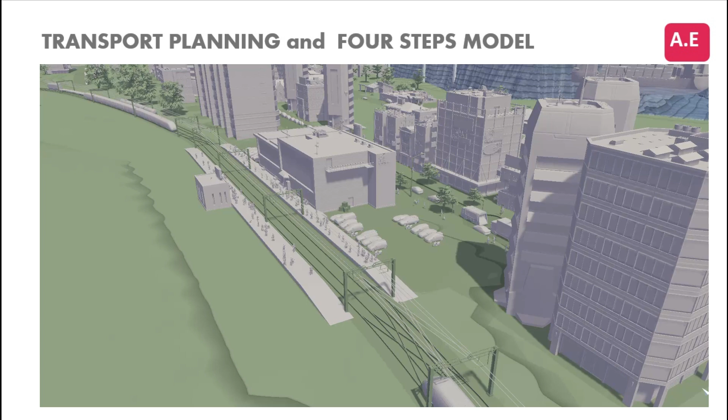Today, we embark on a journey into the fascinating world of transportation planning, where the intricate interplay between mobility, sustainability, and urban development shapes the way we move within and between cities. Over the next few minutes, we'll explore the foundational concepts that underpin this dynamic field and lay the groundwork for deeper discussions on demand modeling and trip generation.

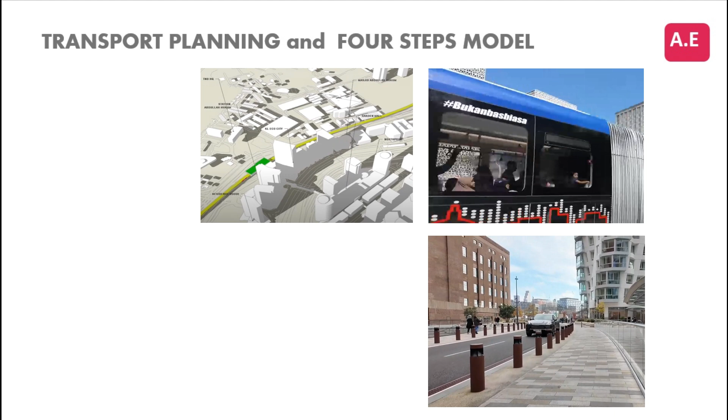Transportation planning is far more than a mere series of decisions. It's a multifaceted process that begins with a vision for a more connected and sustainable future. From articulating goals to assessing opportunities and constraints, we navigate a landscape rich with challenges and possibilities. Key themes such as sustainable mobility and the symbiotic relationship between land use and transportation planning guide our exploration.

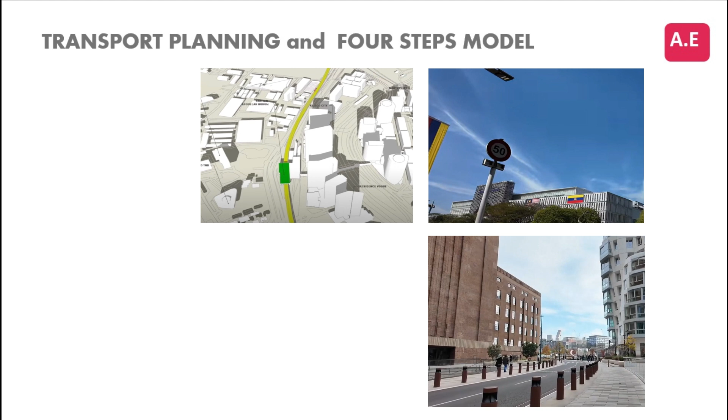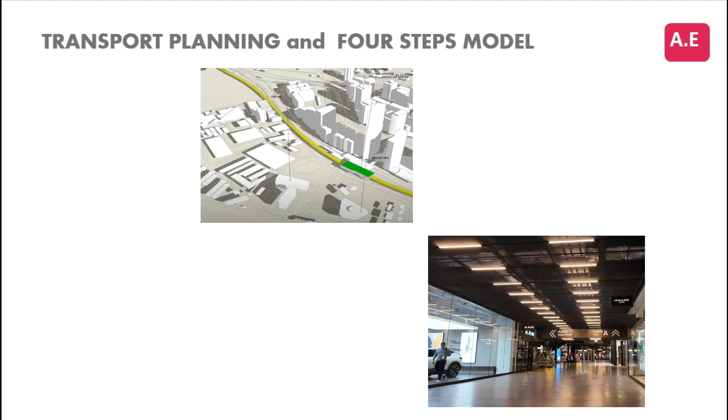We delve into diverse approaches, from supply management to demand management, that offer innovative solutions to transportation issues, fostering inclusive and resilient communities. At the heart of transportation planning lies the concept of derived demand, the understanding that people don't travel for the sake of traveling but to engage in activities. This pivotal insight informs our analysis of travel patterns and helps us anticipate future mobility needs.

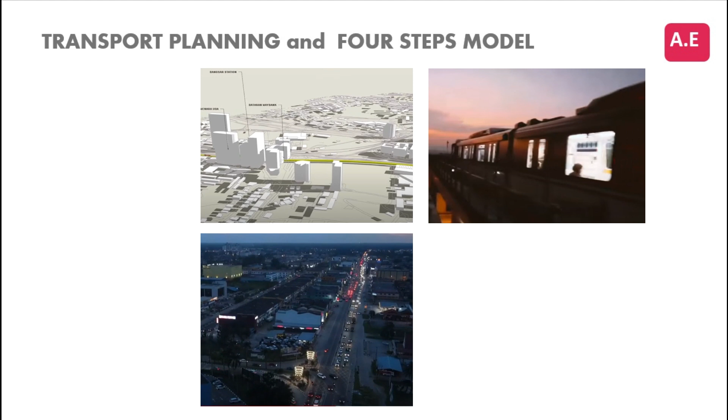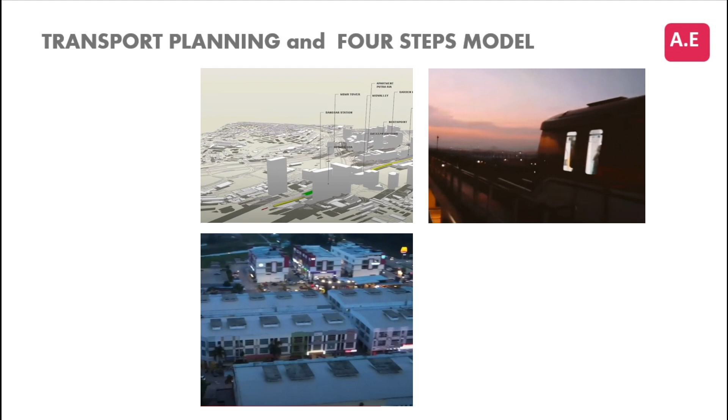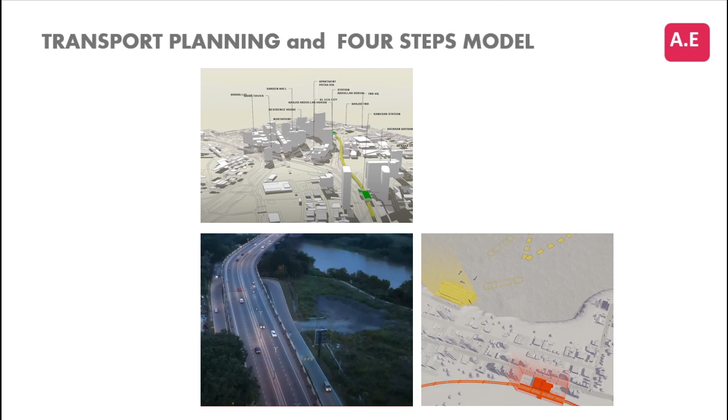A comprehensive four-step modeling framework serves as our compass, enabling us to predict future travel patterns and assess the impacts of proposed developments on transportation infrastructure. Through this lens, we gain valuable insights into the dynamics of urban mobility and infrastructure planning. As we embark on this journey, we lay the foundation for deeper exploration into trip generation, distribution, mode choice, and assignment. Each step forward brings us closer to understanding the intricate web of factors that shape our city's transportation systems.

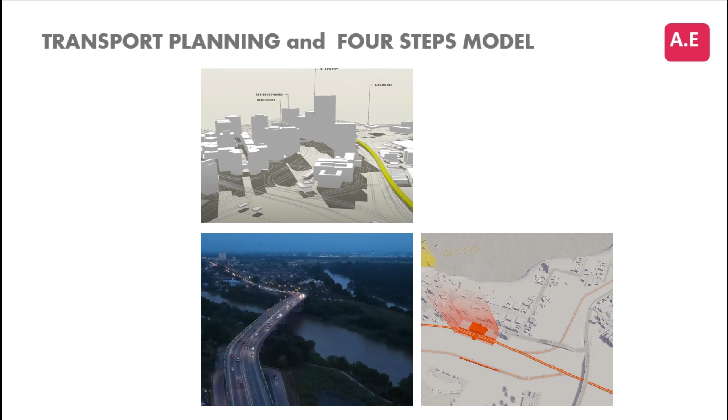In closing, I invite you to join me in unraveling the complexities of transportation planning, as we strive to create more sustainable, equitable, and connected communities for generations to come.

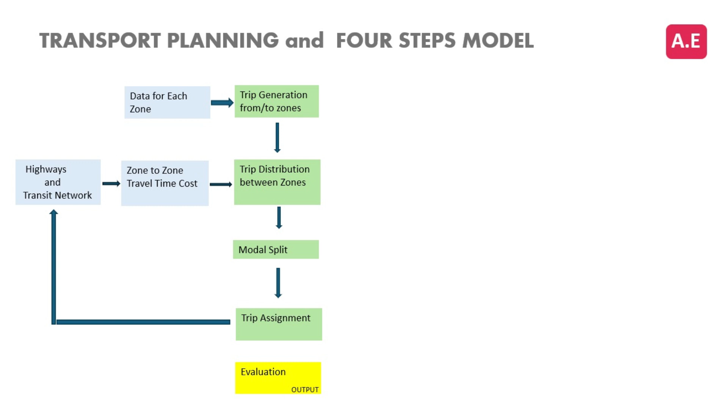Transport modeling typically involves a four-step process, known as the four-step model. Here's an overview. Trip generation. This step focuses on understanding the generation of trips, which are essentially movements of people or goods from one location to another. It involves determining the number of trips produced in each zone, such as residential areas, and attracted to each zone, such as commercial areas, within the study area. Factors influencing trip generation include population, employment, land use, demographics, and socio-economic characteristics.

Trip generation is a fundamental step in transportation planning that involves predicting the number of trips originating from or destined for a particular area. This process helps planners understand the travel demand in different regions and is crucial for developing efficient transportation systems. Here's a breakdown of what trip generation entails. 1. Data collection. Gathering data on land use, population, employment, and socio-economic characteristics of the area. 2. Modeling. Using mathematical models to estimate the number of trips generated. These models often consider factors like household size, income, car ownership, and land use types.

3. Analysis. Assessing the trip production, trips originating from a location, and trip attraction, trips destined to a location. 4. Forecasting. Projecting future trip generation based on expected changes in land use, population growth, and economic development. The output of trip generation analysis is used in subsequent steps of transport planning, such as trip distribution, mode choice, and route assignment, to design and improve transportation infrastructure and services.

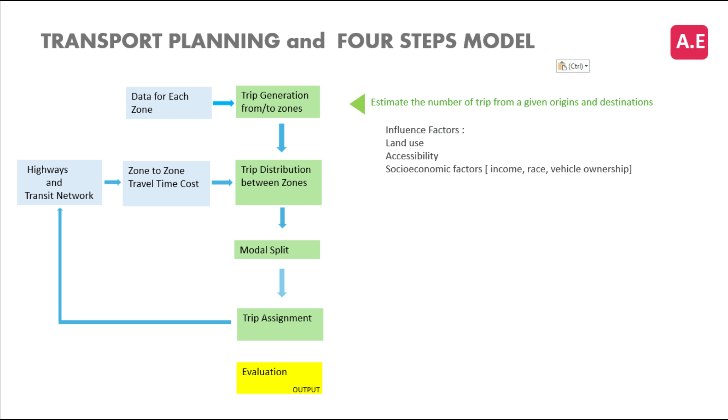Next we look at the trip distribution process of the four-step model. Once trips are generated, the next step is to distribute them spatially across the transportation network. Imagine a city divided into zones. While trip generation estimates the number of trips originating in each zone, for purposes like work or shopping, trip distribution then figures out where those trips are headed. It assigns these trips to destination zones. This process considers factors like zone attractiveness, travel time, and travel cost. Zone attractiveness refers to how many trips a zone is likely to attract. It's essentially a measure of a zone's pull on travelers.

Some of the factors influencing attractiveness are land use. Zones with a mix of land uses such as residential, commercial and office tend to be more attractive because they offer various trip purposes such as work, shopping, and errands. Job density. Zones with a high concentration of jobs attract work trips. More jobs generally mean more potential destinations for people.

Amenities. Zones with a variety of amenities like schools, hospitals, entertainment options, etc., attract trips for various purposes. Accessibility. Zones with good access to public transportation or major roads are generally more attractive as they're easier to reach.

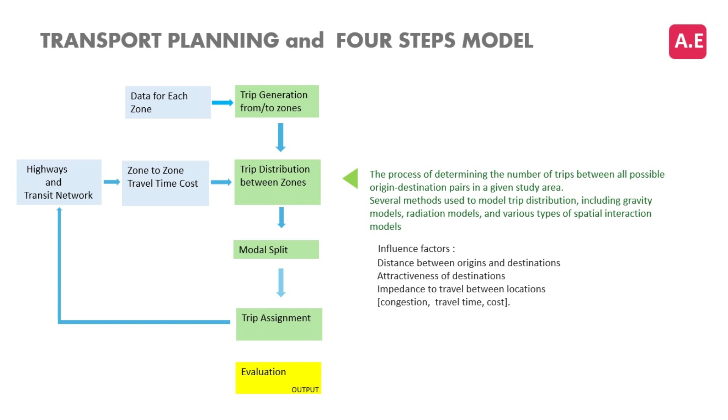Uniqueness. Zones with unique features like major shopping centers or tourist attractions attract trips from a wider area, even if they're not as close. The result is a trip table showing the number of trips between each zone pair. This data helps transportation planners understand travel patterns and optimize infrastructure like roads and public transport.

Next we talk about modal split or mode choice. Modal split, also known as mode choice, refers to the process of determining the proportion of travelers using different types of transportation modes, for example car, bus, train, bicycle, walking, for their trips. It assesses how people choose among available transportation options based on various factors.

Several factors can influence an individual's choice of transportation mode, including travel time, or the duration of the trip using different modes. Cost. The monetary cost associated with each mode, including fares, fuel, parking fees, and maintenance. Convenience and comfort. Factors such as the frequency of service, availability of seats, cleanliness, and overall comfort.

Accessibility. How easily travelers can access different modes, including the proximity of transit stops or stations. Reliability. The consistency and dependability of the service, including punctuality and service interruptions. Safety and security. The perceived and actual safety of using each mode, including accident rates and crime levels.

Environmental concerns. Awareness and attitudes towards environmental impact, leading some to choose more sustainable modes like cycling or public transit. Socioeconomic factors. Income, age, gender, and car ownership can also influence mode choice.

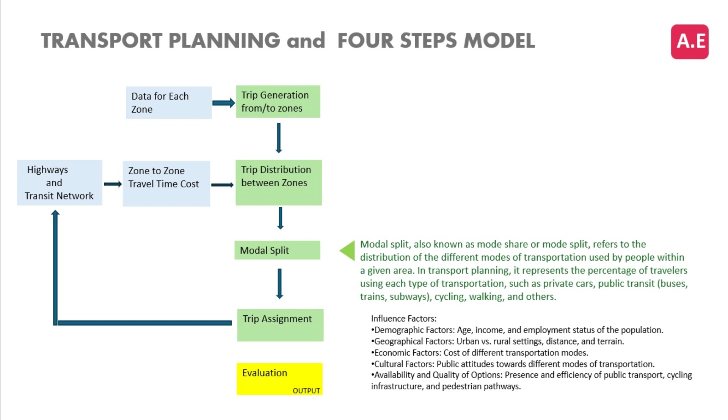Finally, we talk about trip assignment. Trip assignment. The final step assigns the trips to specific routes within the transportation network. It involves determining which roads, public transit lines, or pathways travelers will use to reach their destinations. This step often involves traffic assignment algorithms that consider factors such as travel time, congestion, capacity constraints, and network connectivity.

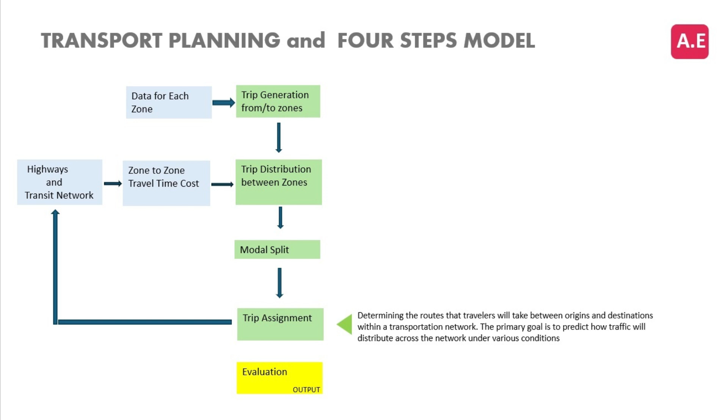These steps are iterative and interconnected, meaning that adjustments made in one step can influence the outcomes of subsequent steps. In conclusion, transport models help planners and policymakers understand current travel patterns, forecast future demand, evaluate the impacts of proposed transportation projects or policies, and identify strategies to improve transportation systems' efficiency and sustainability.

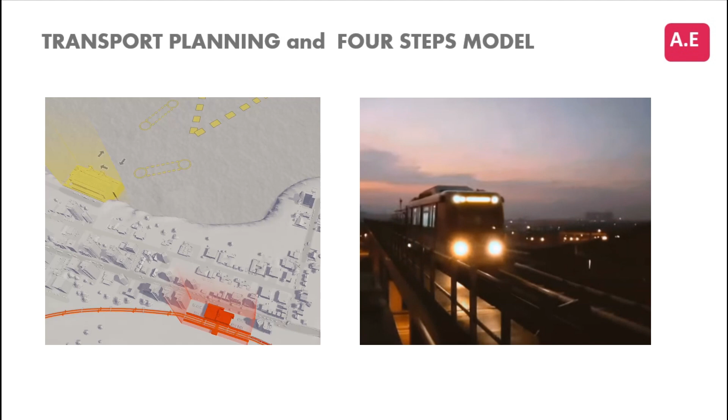As we conclude our exploration of the four-step models in transport modeling, I would like to take a moment to reflect on the significance of this powerful framework. The four-step model, comprising trip generation, trip distribution, mode choice, and route assignment, provides us with a robust tool to understand and predict travel behavior. By breaking down the complexities of transportation into these distinct steps, we can better plan, design, and manage our transportation systems.

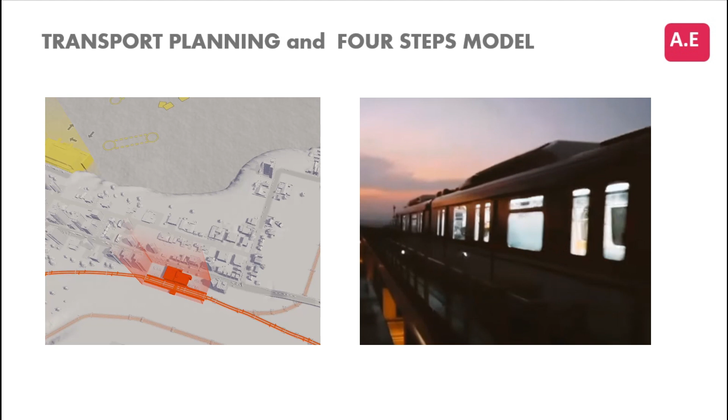We've seen how trip generation helps us identify the origin and destination of travel, trip distribution shows us the connection between different locations, mode choice offers insights into travelers' preferences, and route assignment determines the paths taken by travelers. Each step, while unique, contributes to a comprehensive understanding of travel patterns and behaviors.

The application of these models extends beyond mere theoretical exercises. They are integral to urban planning, policy making, and infrastructure development. By accurately forecasting travel demand, we can make informed decisions that enhance mobility, reduce congestion, and promote sustainability.

As we move forward, let us continue to refine these models, integrating new data sources and leveraging advanced technologies. The future of transport modeling holds immense potential, with opportunities to create smarter, more efficient, and more sustainable transportation networks.